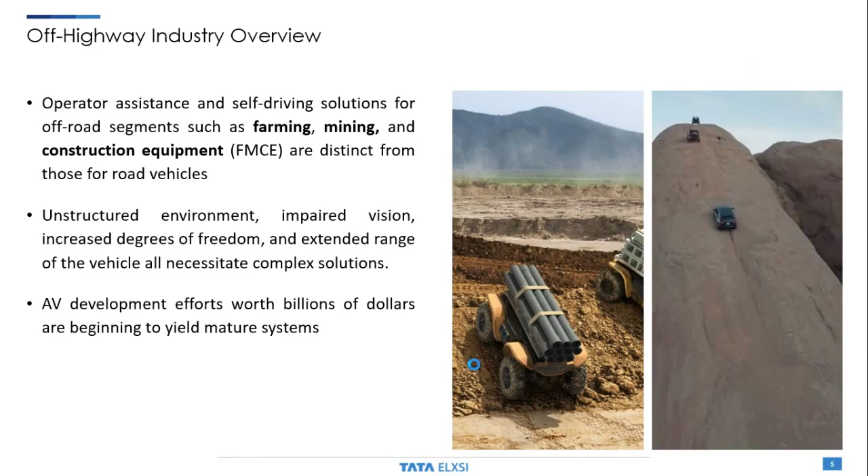And this is even applicable for all the domains like agricultural, construction, lawn and turf care, material handling, and it is addressing all these sectors. When we look a little more deeply into the autonomous machines, that means the expected market uptake of autonomous machines, here also we can see a significant impact from 2020 to 2030, especially in the adoption of these technologies.

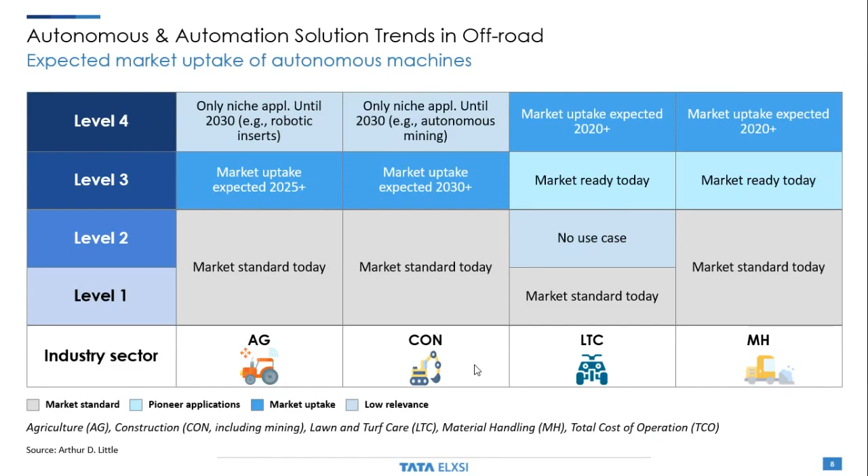The use cases we are planning to discuss today: the first case is workers operating in construction and mining sites, for example vehicles like autonomous dozers, excavators, load carriers, and haulers. These are supposed to be operating for excavating and grading kinds of operations in construction sites and mining sites. These kinds of vehicles are, in some cases, often connected to perform coordinated actions.

And terrain mapping and visualization in these scenarios bring many complexities in their autonomous operation.

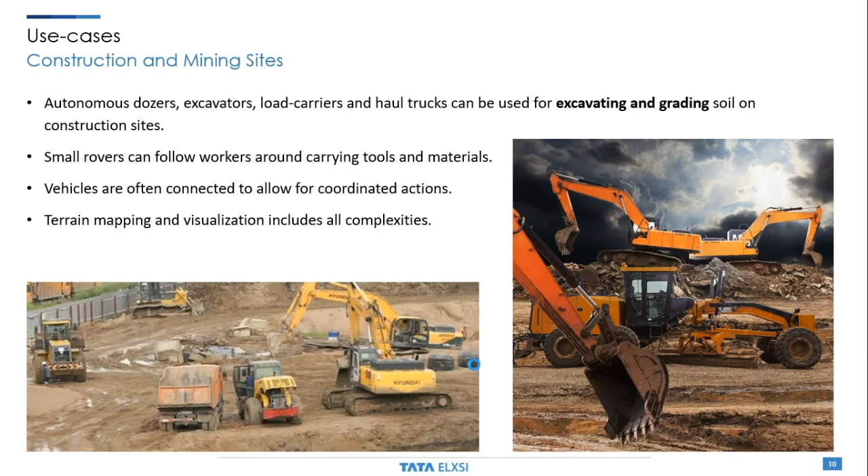Another case is the support in agricultural activities. That means the vehicle is supposed to be a support to perform actions in agricultural activities. A research study shows the autonomous farm equipment market will be worth 150 billion US dollars by 2031. These kinds of vehicles not only reduce manpower but also enhance safety and precision in operations.

And these multiple machines, manned or unmanned, can even coordinate and perform operations in a field to accomplish the task in a very cost-effective and time-effective manner.

Another study from the National Agricultural Tractor Safety Initiative in the US reports that tractors cause about 130 deaths annually. Here comes the importance of bringing operator assistance solutions, and toppling prevention is an example of such operator assistance solutions in tractors.

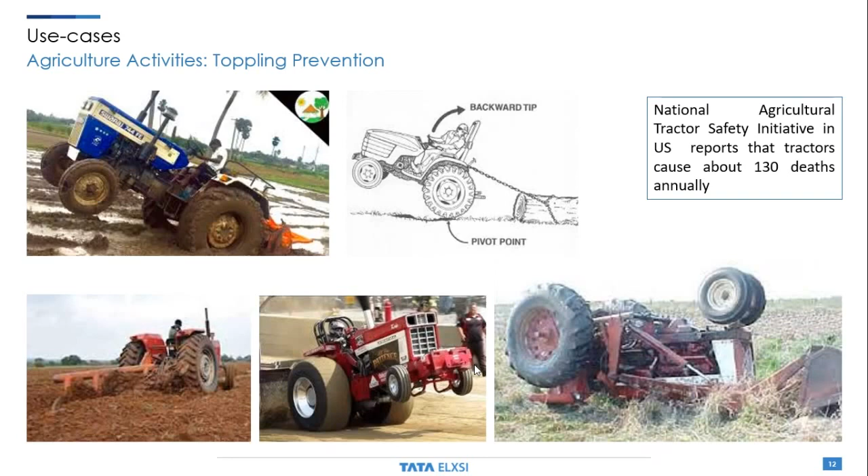Another support is for hitching the trailer, the trailer hitch. We know that parking a vehicle attached with a trailer is a challenging task even for a well-trained driver, and trailer hitch assistance and autonomous trailer hitch solutions are right around the corner.

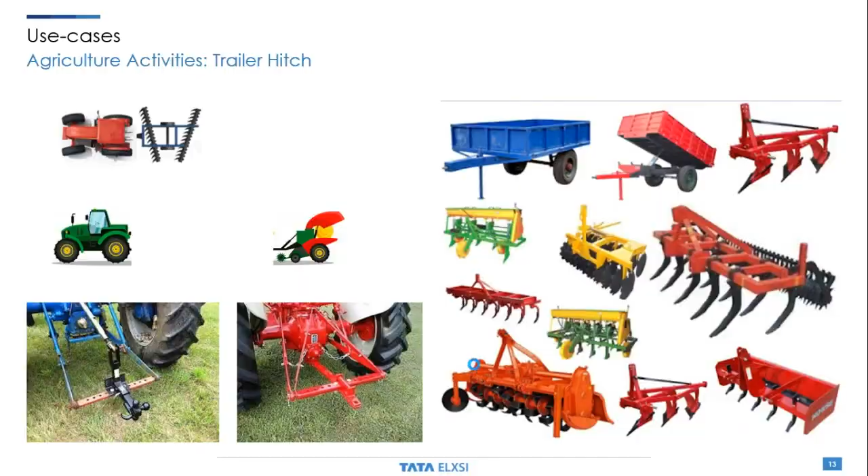Then coming to the challenges associated with the use cases.

Depending on the mode of operation of these vehicles, one major issue is degraded visibility, because the environment is continuously changing and can experience challenges due to dust, fog, rain, and low light conditions. All these conditions demand high resolution cameras, infrared cameras, and high cost lidar sensors.

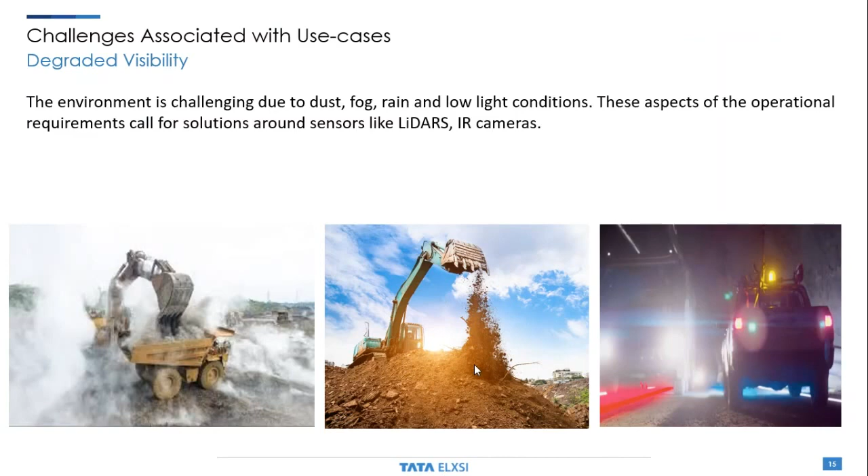Another factor to consider in the development phase is the impact of weather on perception solutions. Different weather conditions can affect sensor performance, causing poor visibility, reduced range and field of view, and reflections and shadows in captured images and point cloud data.

So in some cases, ruggedized enclosures and other cleaning mechanisms are required in order to protect sensors from the impact of weather.

Another important issue is the challenges due to unstructured environments. For example, consider vehicles operating in mining sites. We can't expect a continuous GPS signal at all times in such sites. The GPS satellite signals may be corrupted by data noise, multipath errors, clock errors, or atmospheric delays.

In other cases, depending on the site where the vehicle is operating, it is very difficult to represent the boundary of the drivable region.

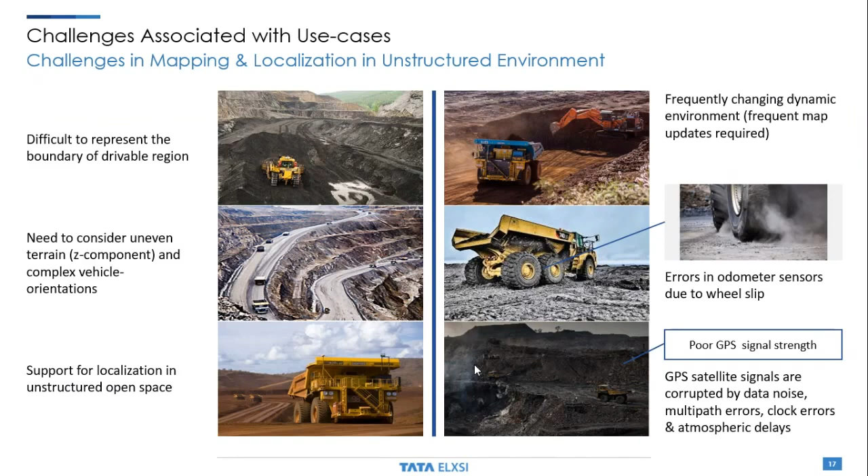Another factor is the mode of operation. These vehicles, especially excavators, are supposed to operate in extended reach. Depending on the mode of operation, an extended range of activity is required for excavators most of the time.

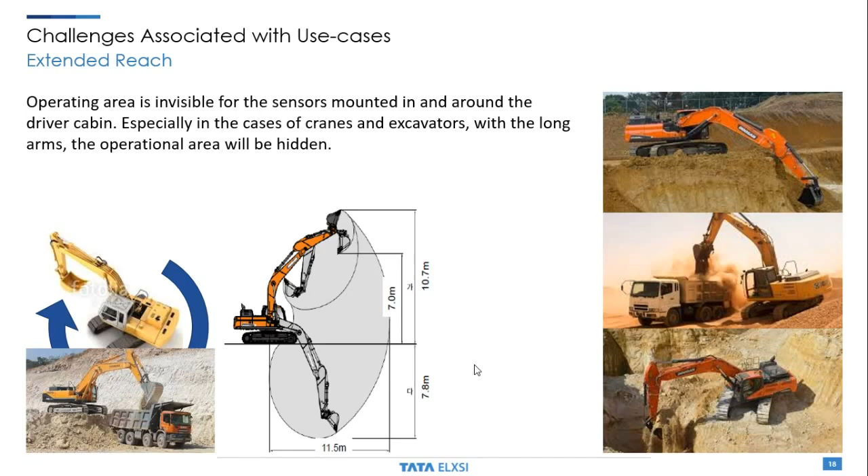The operating area is invisible for sensors mounted in and around the driver cabin, especially in cranes and excavators, which have long arms and a very wide operational area.

Another issue is sensors attached to the moving parts of the body. Since the vehicle is completely different from on-road vehicles, it has periodically moving parts. For example, in an excavator, the arm and bucket are continuously moving for digging and loading activities, so sensors attached to the bucket and boom may experience interference and noise due to this motion.

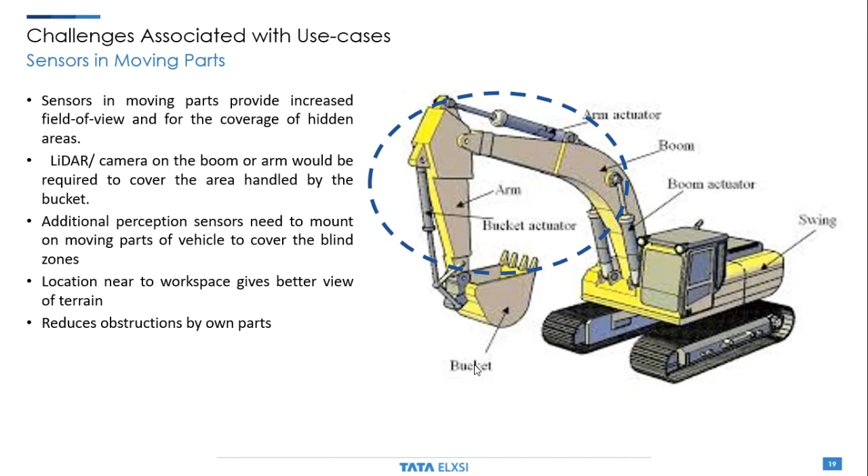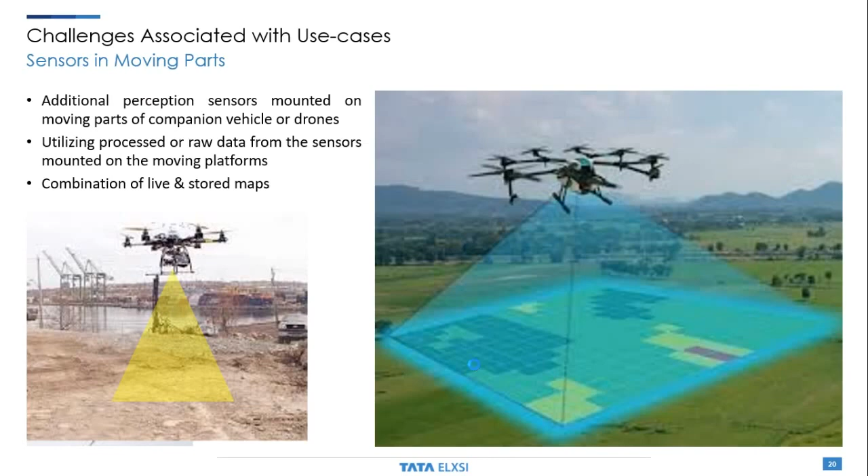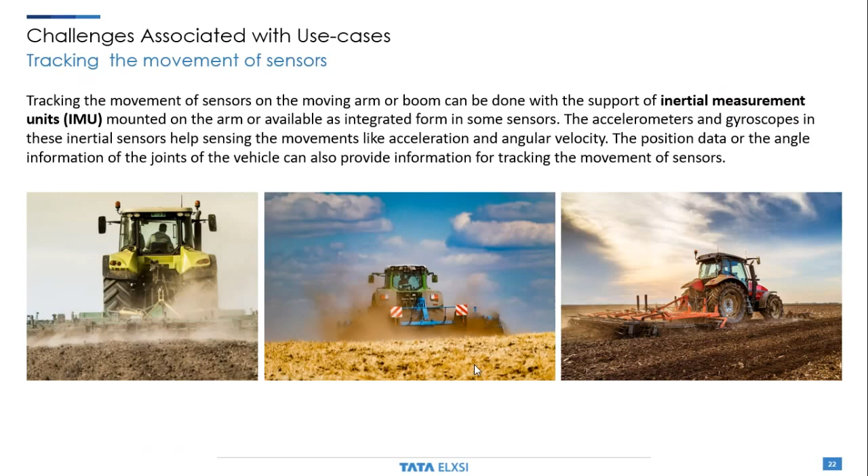Another sensor requirement is IMU sensors, meaning inertial measurement units. This is commonly used for tracking the movement of sensors. The accelerometers and gyroscopes in this IMU unit help sense the movement of the vehicle and vehicle parts, giving measures like acceleration and angular velocity. The position data or angle information of the joints of the vehicle can also provide information for tracking the movement of sensors.

Another factor we need to consider is how to handle the varying field of view of sensors. As I said earlier, for example, in the case of a vehicle like an excavator, when we look at the mode of operation, they are meant for doing extended reach kind of operation. Since the sensors are attached to the moving parts of the vehicle body, it experiences a continuous variation in their field of view. So that has to be handled and tackled in the development stages.

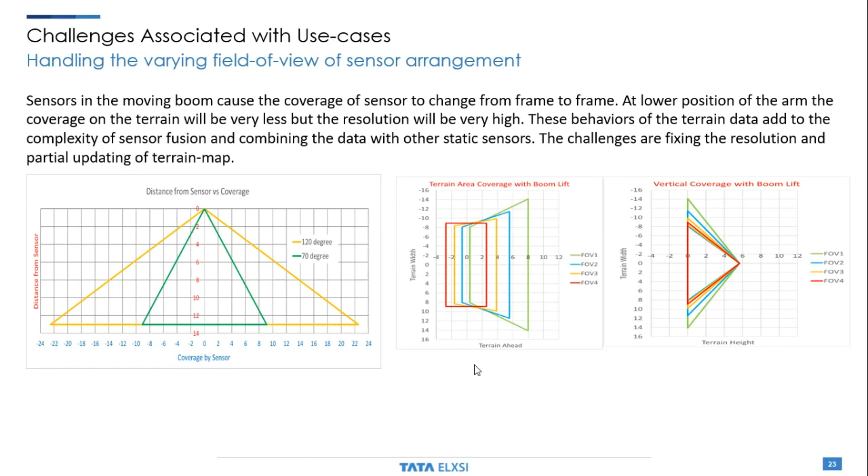This figure illustrates correctly how the field of view varies when the sensor is attached with the arm or boom of the excavator vehicle. These sensors cause the coverage of sensor to change from frame to frame. At the lower position of the arm, the coverage on the terrain will be very less, but the resolution will be very high. These kinds of behaviors of the terrain data add more complexity, and we require sensor fusion techniques for combining and getting at the correct view of the environment, the terrain.

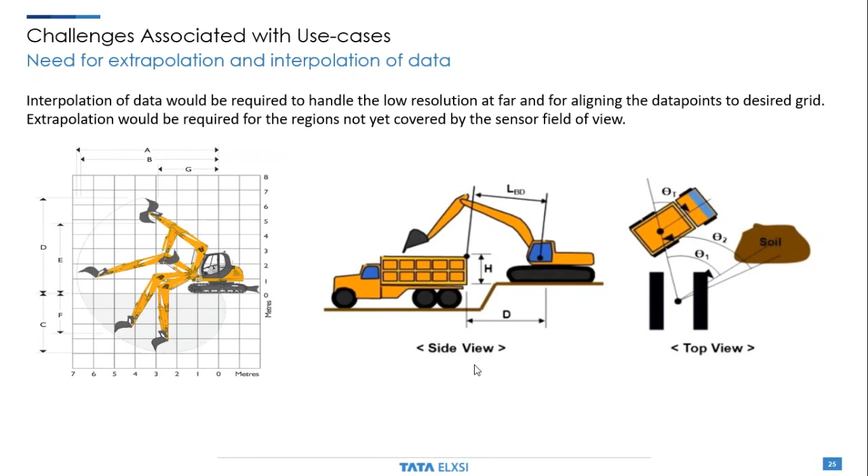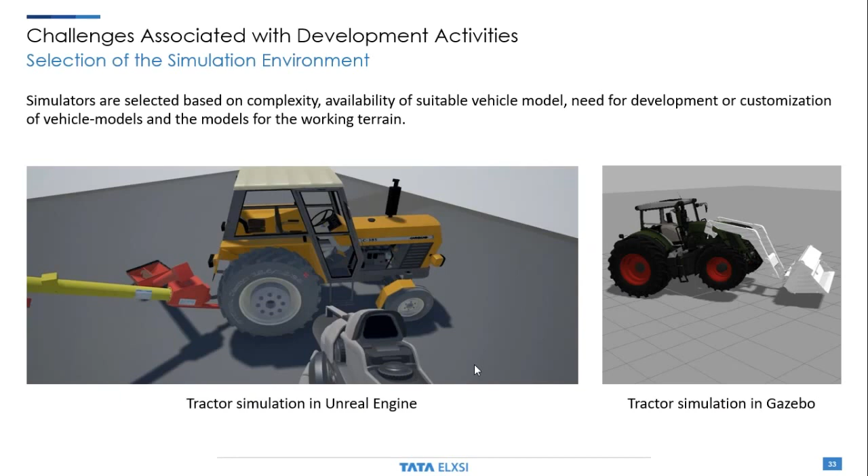The working environment shall support the essential features of the operation by the vehicle. For example, for modeling the digging action of an excavator, the environment shall be diggable. Rigging of the model is done by customizing the bones and joints of the model. Good expertise is required for conceiving the maneuvering of the vehicle parts and the vehicle, and its mathematical modeling.

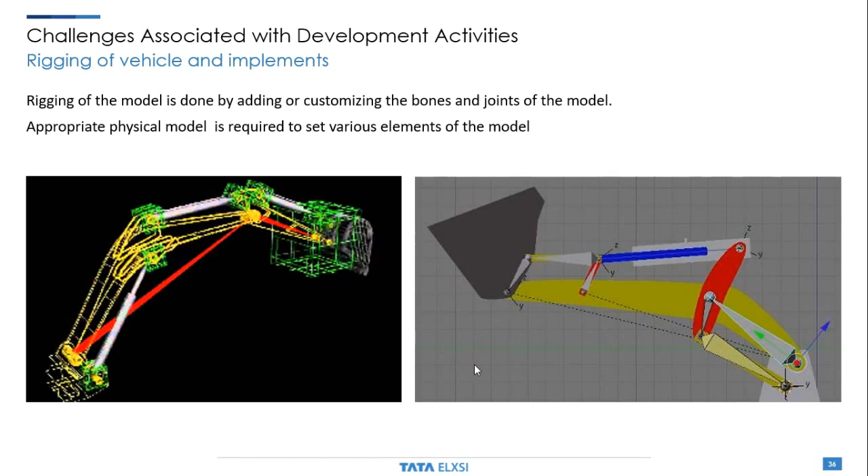Another factor is the selection of sensors. All-weather, day-night operations demand complex perception solutions with special consideration for sensor usage. As we know, camera is very good for classification applications, whereas LiDAR has moderate classification support, and radar has poor classification support. But in terms of resolution, camera has very good resolution, LiDAR has moderate resolution, and resolution is very poor for radar.

Especially for off-road solutions, LiDAR is a preferable solution for that type of environment it is facing. Sensors shall be modeled as per their specifications. Resolutions, scanning rate, and scanning patterns are to be replicated. While standard models of LiDARs are available, customization or remodeling would be required for MEMS types of sensors.

Another factor we need to consider in the sensor modeling is the scanning pattern. The scanning beams of the sensors may be in yaw plane or pitch plane, giving out different types of scanning patterns. Here we show two examples: one where scanning is done in the yaw plane with pitch varying occasionally at a slow rate, and another where scanning is done in the pitch plane with the yaw angle occasionally varying. These sensor models give different types of streaming output, which is important for optimization.

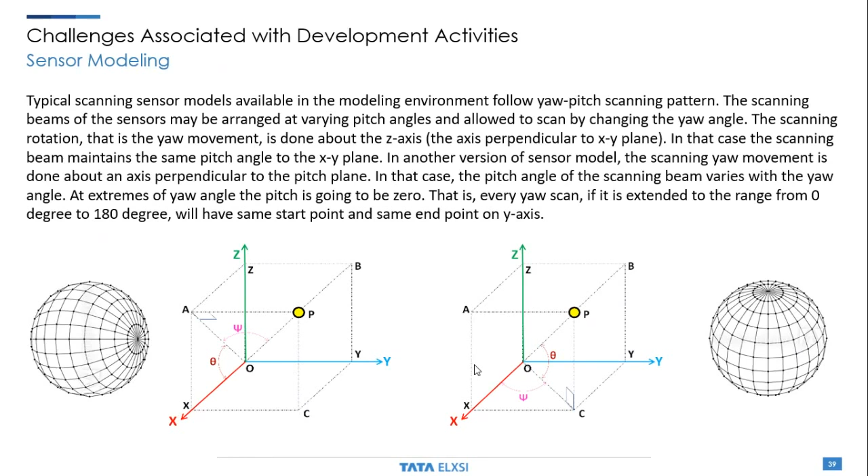Then comes how to model the use cases. The use cases shall be modeled as per the test cases. ROS integration and animation scripts can help implement the maneuvering of the vehicle and its interaction with the environment.

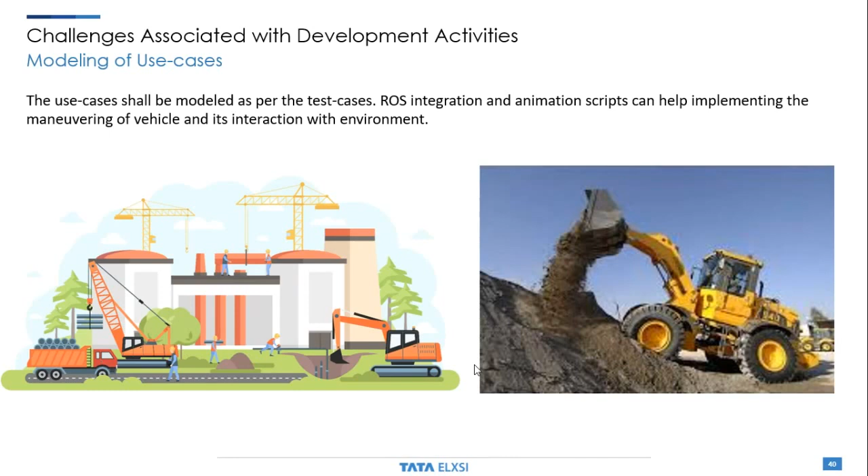Another important factor in the development stage is how to format and store sensor data. The sensor data can be in raw form or processed form, depending on the module under test consuming the data set. Noise shall be added to the ground truth data at an appropriate level to create sensor data. The storage requirement is a challenge considering the huge data set and huge number of test cases.

Now, moving on to the discussions on solution concepts. The main focus is given to perception, localization, and mapping.

The solutions for off-road vehicles can be grouped into two: autonomous vehicle solutions and automated implement solutions. The key enablers for these solutions are perception systems, localization, guidance and navigation, drive-by-wire systems, vehicle controllers, etc. In similar lines, the implement subsystem also has building blocks of perception, localization, control-by-wire, and controllers.

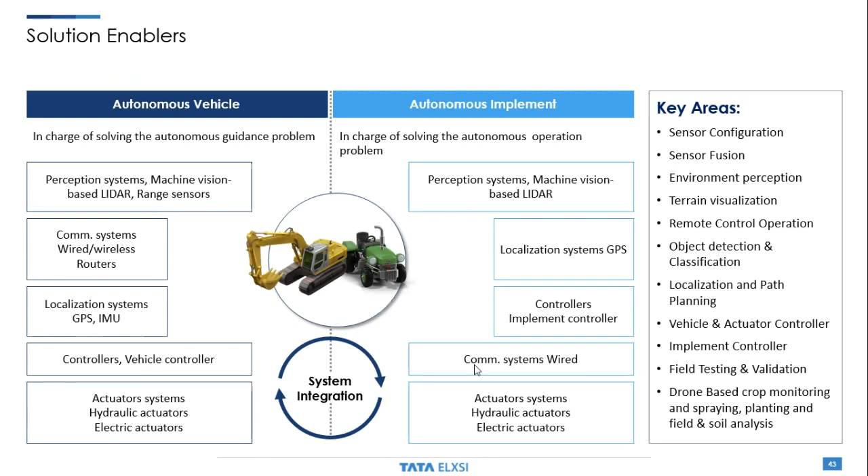The key solution areas are perception, sensor fusion, object detection, classification, tracking, localization, planning, and motion control, then implement control and vehicle control.

In the case of environmental perception, we have technically sound camera-based solutions for object detection, classification, semantic segmentation, and drivable path detection.

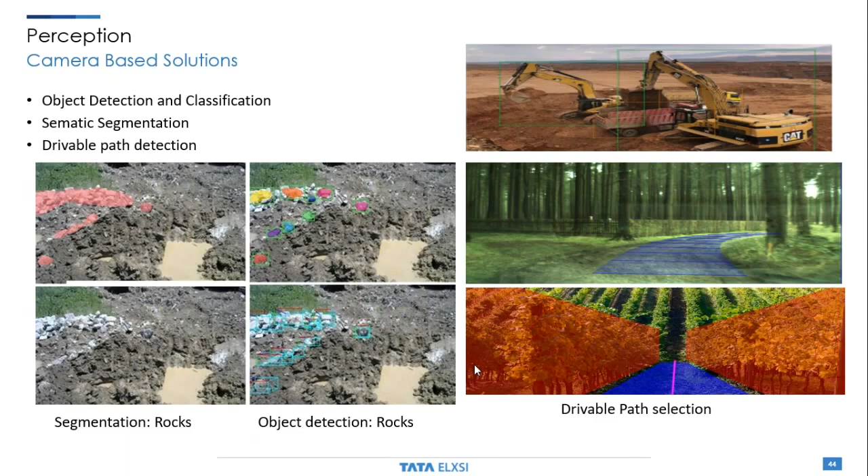For many use cases, LiDAR-centric solutions are necessary for off-road solutions. Our solutions cover object detection, class proposal generation, segmentation, localization, odometry, etc.

A data agnostic sensor fusion framework can meet the homogeneous and heterogeneous fusion requirements of off-road solutions, accepting different sensor types and different sensor counts. It supports sensors like LiDARs, cameras, radars, and other proximity sensors. The fusion can be done at different levels, from low-level raw data fusion to high-level information fusion.

Localization is an important step to proceed with autonomous navigation. We have seen that localization is a bit challenging for the off-road segment. Tata Elxsi has LiDAR-centric localization solutions that are suitable for off-road vehicles.

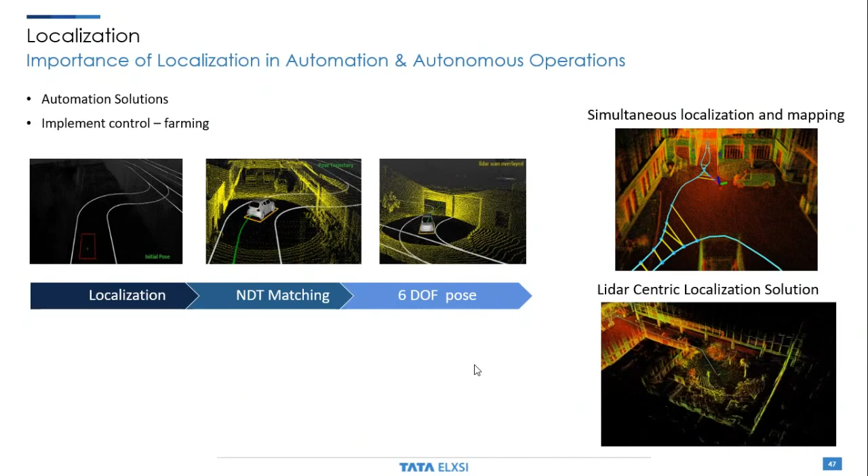A typical solution for the map generation framework is shown here. The solution is meant for reducing the data volume and for speeding up the post-processing. While LiDAR data is used as a source of feature points, other sensors like IMU and GPS help optimize it further.

The concept for optimization of map generation from PCD to feature points is illustrated here. The segments are selected first and the key feature points are extracted from the selection.

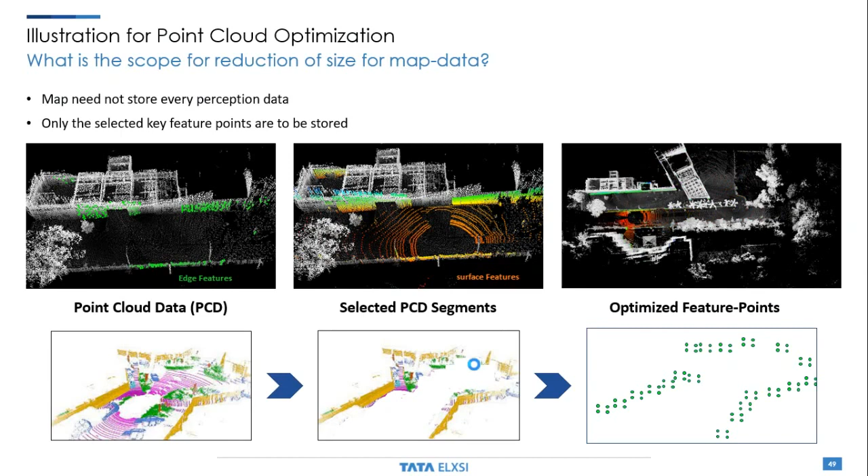Continuing on mapping and localization, this illustration shows the relative timing of the algorithm modules. The map generation can be at a lower rate compared to the perception and localization, and the solution is suitable for reducing resource utilization.

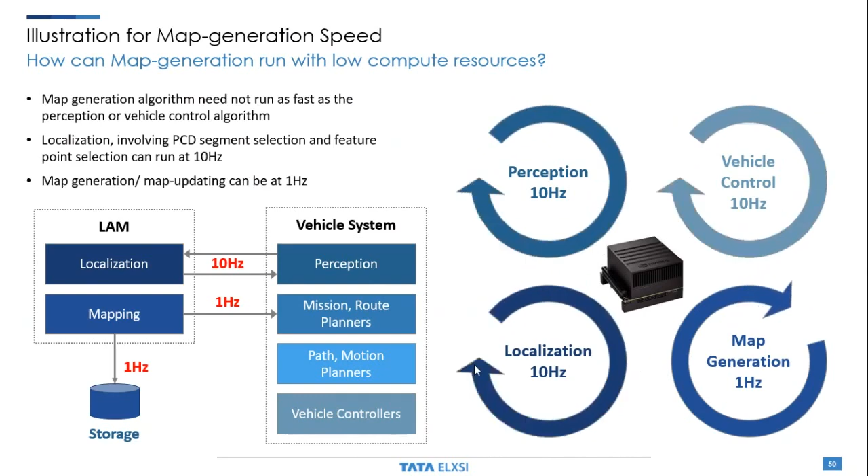This block diagram shows the existence of localization and mapping along with other vehicle subsystems. The feature selection is optimized based on the detections from the perception layer, which helps eliminate temporary objects from the map. The motion tracking data from sensors like IMU, GPS, wheel speed data, and steering angle data can optimize the performance of the algorithm.